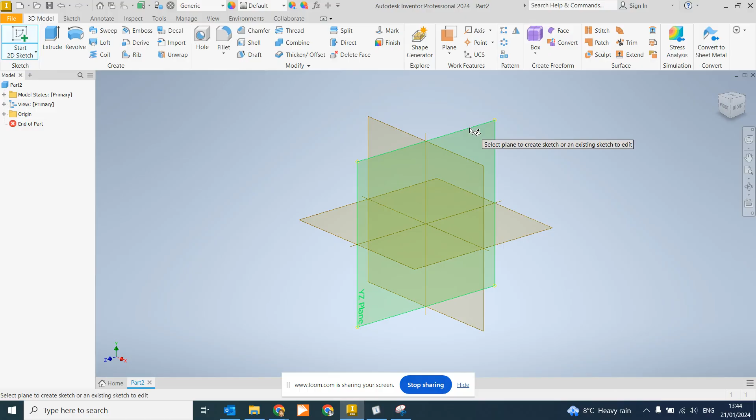So I'm going to start off with that forearm, that 8 by 4 rectangle. Start a new sketch, and I'm going to click on this right hand plane, then do the rectangle tool. I'm just going to use the normal rectangle tool this time, not any of the 2-point centers, just the top one as in the picture. I'm going to click on that center point and move down to the left and up.

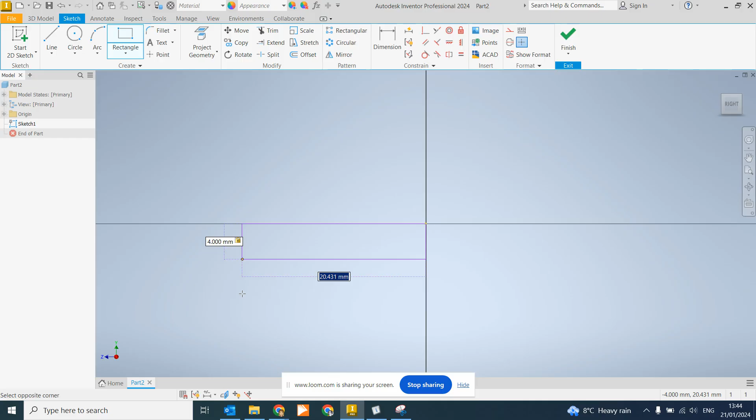I've forgotten the size, but I think it was 4 by 8. So I'm typing 4, hitting tab on my keyboard, which is the arrows that face opposite directions above your capital lock button, and by 8. Before I hit enter, I'm just going to double check that size - and it was 4 by 8. That is fine. Enter.

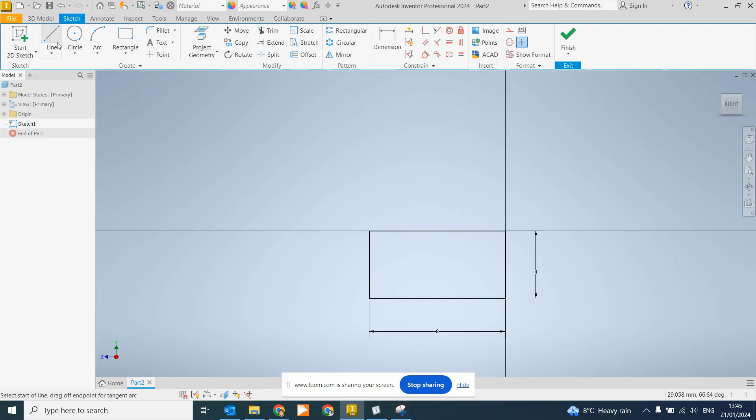Okay, to get the angle going up the way, I'm just going to move that 4 dimension out of the way. I'm going to use the line tool, clicking on the bottom of the rectangle where the elbow is going to be, and move my mouse out in roughly the right direction. I'm going to type 10.

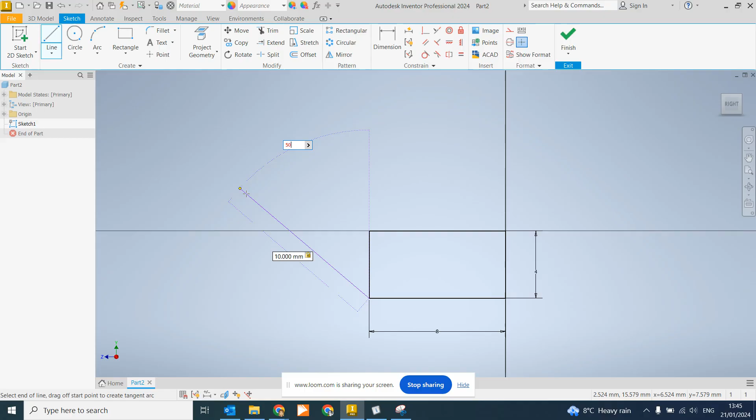The angle up here at the moment says 60. If I hit that tab button again, the arrows above your capital lock button, it allows me to choose the angle that I want. It doesn't tell us an angle - we're not told one - so really we can just choose whatever we like. I'm going to go for 50 and enter.

That's fine. The next thing - you'll notice the line is still attached to the end of the line. I can continue drawing another line, and I'm going to do a right angled turn here and come in the way, but I need to know how far to come in.

So having a little look at the drawing, I can see the shoulder here has a radius of 2.25. Now radius is from the edge to the center point, so I'm going to draw a line that's 2.25 and that will give me my center point, as long as it's at 90 degrees to this 10 line. So coming over, I'm going to type in 2.25, hit tab, and make sure that reads 90 for 90 degrees, and say OK.

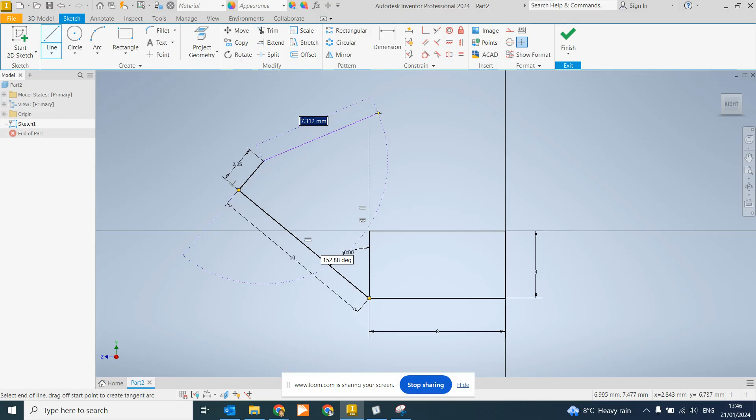At this point, I'm going to hit escape on my keyboard, the top left button, to cancel the line tool. Now I know that the shoulder is a circle, an arc, with the center point at that 2.25, and it's going to touch the outside edge. So I'm going to take the circle tool, click on the end of that line, looking for that little green dot, and then click where it meets that 10, again looking for the green dot. And I know that that is the right size for the shoulder.

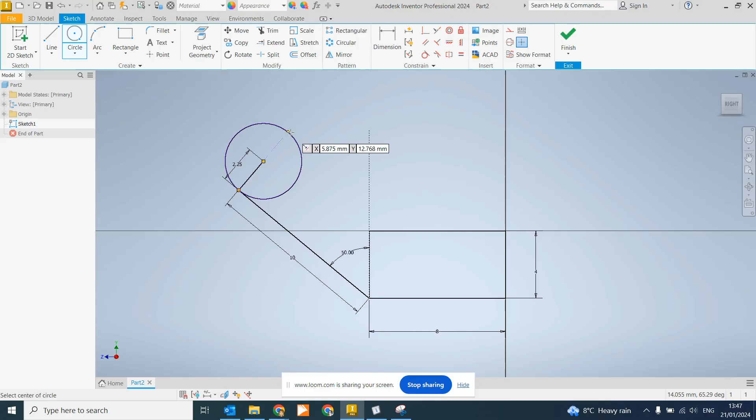Okay, all I have to do now is draw a line from the edge of this circle down till it touches the top of this rectangle, down to where the forearm is. So using the line tool, I'm going to follow this line along till I get to the other side of the circle. You'll notice a little line appears and gets a little yellow cross when you're in the right place. Selecting that point, I'm going to move my mouse down - it kind of locks onto parallel, that little T shape appears with the red line and the black line when I'm parallel. Then I'm just going to keep coming down until I'm on top of that line, clicking there. Okay, and that is the shape of our arm.

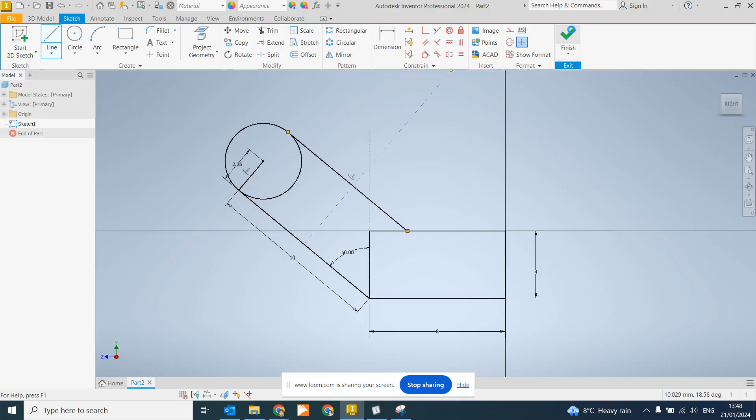So I'm going to click the big green tick to finish sketch. As I said, this one's a little bit more complicated, so if you need to go back through that video, that is fine.

Okay, so looking to see how much I need to extrude that shape by. I can't see it on the end elevation, so I need to look up at the plan, and I can see that it is a diameter 3.

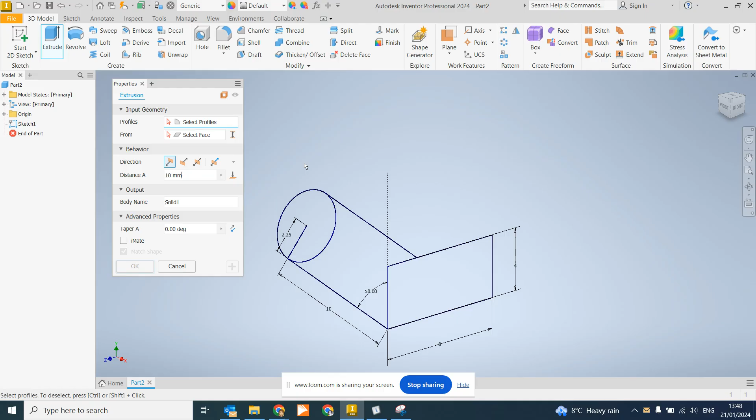Okay, so going back to Inventor, extrude, and I need to select all the different shapes. There's 3 different shapes - you've got the forearm, the shoulder, and then I don't know what that middle bit of your arm's called. And then I'm going to change the size from 10 to be 3. Okay.

Going back to the picture. We have a little bit that sticks out of the shoulder joint to allow the arm to attach to the body. So I need to look at what information I have about that. I can see it's diameter 2, so it's just a 2. It shares a center point with the outer edge of the arm, and it's extruded by 2. So that's nice and easy.

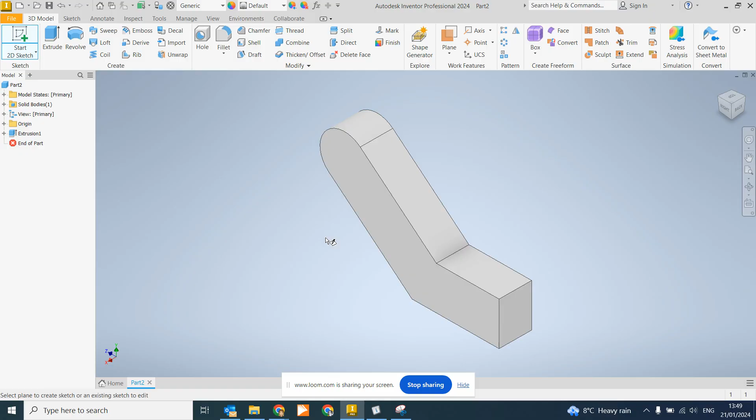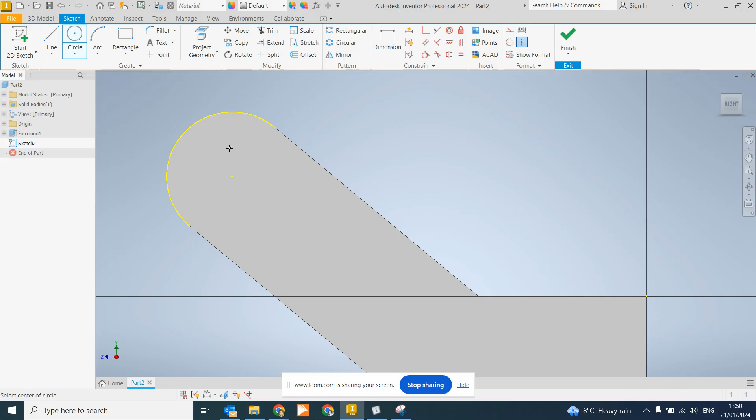It's 2 by 2. So on Inventor, I'm going to click the Start Sketch button, and select the front face of the arm. At the moment I can't see where the center point of that shoulder is, so I'll use the Project Geometry tool, this big button here, and select that curve, and that yellow center point appears. Click the circle tool, select that center point, type 2, hit enter, big green tick, finish sketch. We're then going to extrude that circle by 2.

Back to the drawing. I also have a hole in the end of the forearm to allow the hand to attach to the arm. The information I'm given is it is diameter 1, and it is subtracted away by 1. So start a new sketch onto the end of the hand.

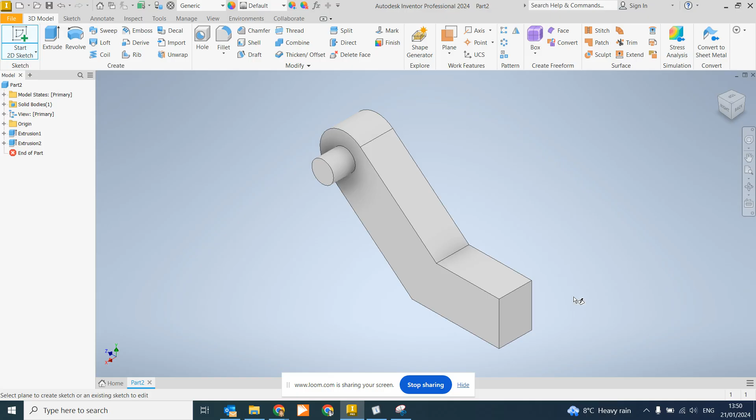I'm going to see if I can find the midpoint using the circle tool, trying to find the midpoint of the arm. It should lock on - it's yellow, and then when it's at that halfway point it turns green. Do you see that? Yellow, green. That's my halfway point. I'm going to move my mouse up, get a little dotted line, and I'm hoping to find the midpoint up and down. Not finding it at the moment. I'm going to try the side. Not finding it on that side. Let's try this side - yellow. Hoping to find a little green dot. There's my green dot.

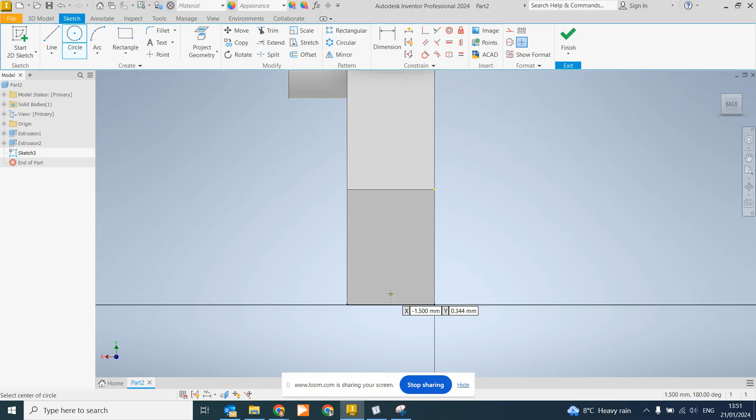I'm trying to get them at the same time if I can. Okay, it's not letting me. Sometimes it does, but not today. So I'm just going to find one of them - I'll go for the bottom one, and move my mouse up. As long as I'm on that dotted line, I know I am at the midpoint left to right. I'm going to click and type 1, enter. But now I need to make sure I'm at the center point up and down between the top and bottom of the wrist bit.

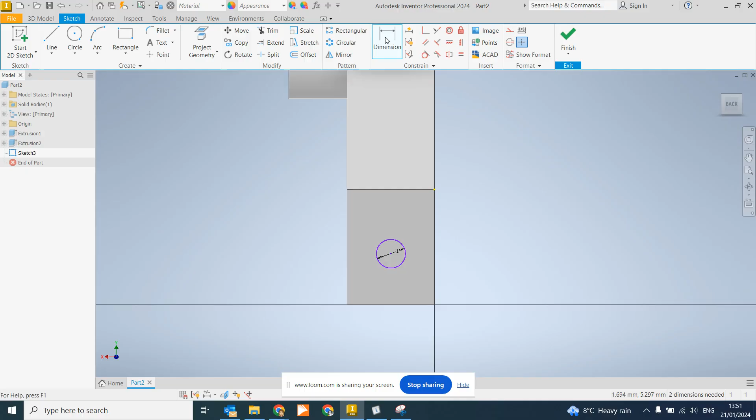So I'm going to use the dimension tool. I'm going to click that top line - that creates a dimension, just ignore that - and the center point of the circle, which creates another dimension. I'm going to move that to the side and click. Now I need to know what size I want that to be. The top to bottom of that forearm was 4, so it's going to be half of that, 2. So I need to make that 2, enter. And I know that's in the middle now, so I can do big green tick, finish sketch.

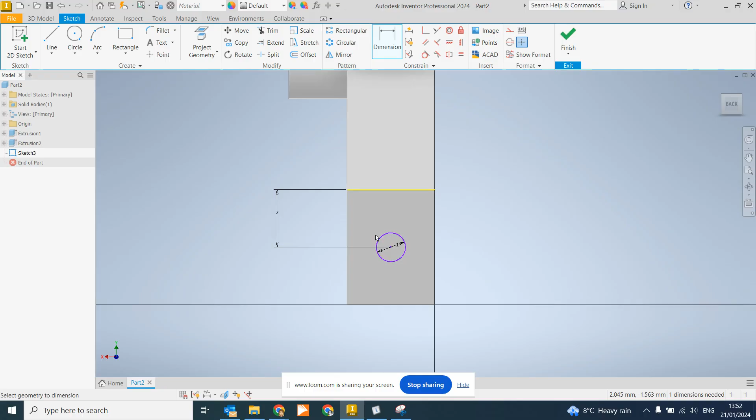I then need to use the extrude tool to subtract that. To subtract it, I need to go to the output section, and it's not the first button, it's the second button called cut. And the distance was 1 millimeter.

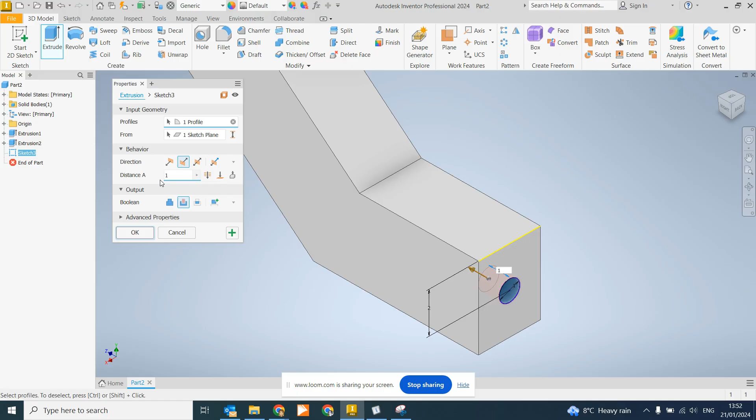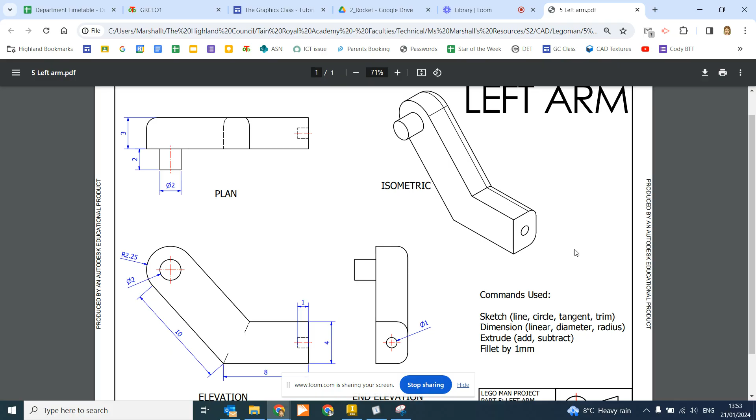The last thing we want to do is add a fillet to the back edge of the arm. If you look, you can see it's not angular - it's got a wee curve to the outside edges of the arm. There's no information about that on the drawing - I can see the curve, but I'm not given a size. I can't see it in the elevation, and again I can see the curve in this drawing, but it's not there. So I'm going to go over to the additional information I'm given, which tells me what commands have been used. At the bottom it says fillet by 1 millimeter, so that means the top and bottom of the arm are going to get filleted by 1 millimeter.

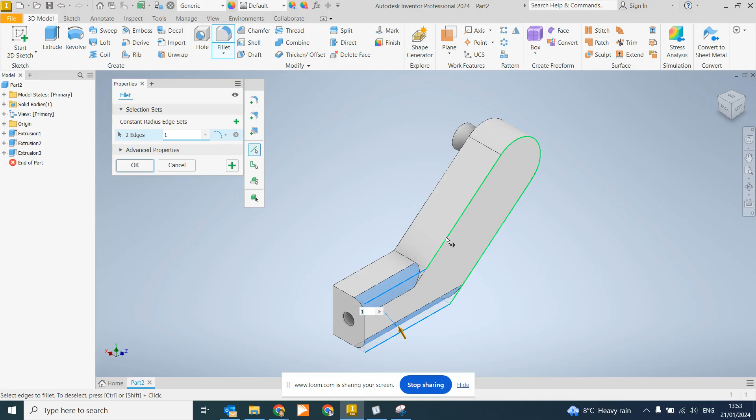So I'm going to turn myself around using the navigation cube in the top right-hand corner of the screen. I'll click that top right corner and that will turn me around. Then I'm going to find the fillet tool - it's up the top, it's quite big, next to the hole tool. Click that, change that 2 millimeters to be 1 millimeter. Then I'm going to select the top of the forearm, the bottom of the forearm, and this big curvy line up to the shoulder. Once you've done that, you say okay. And that's the arm being made.

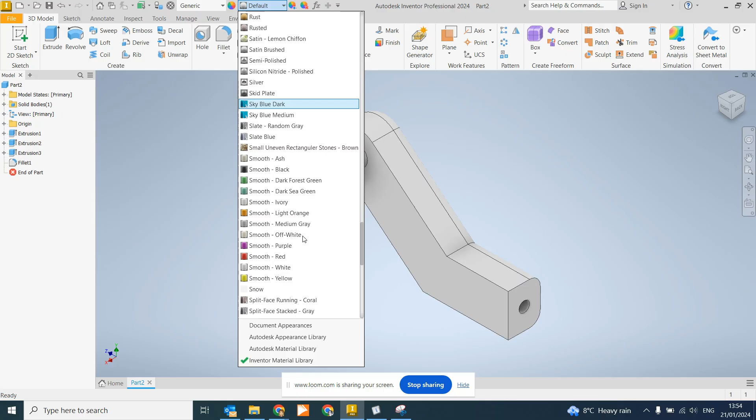I'm going to make my arm the same color that I made the body. Up the top I've got my drop-down menu default. I'm going to click once and wait because it takes a wee while to load. I'm going to go down to the green - I wish I could remember which green I used, I think it was forest green. I might have to change it later, but yeah, that looks good.

So I need to save it. Remember, it's not like a Chromebook, so you need to go File, Save. I need to call it arm. And that is, you made that.